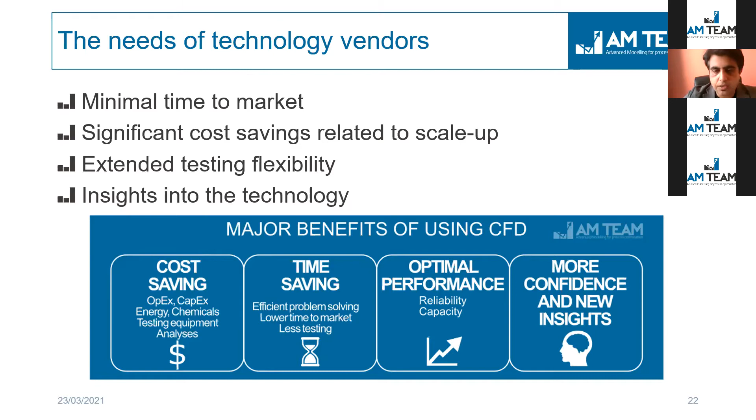So I will start with one example. In this case, the client is a Japanese client who were actually constructing a pilot for an MBR bioreactor. They had a very small lab scale bioreactor, which they wanted to scale up to a demonstration scale, so almost 30 times more than their lab scale. So this is a huge transition. It involves a lot of expenditure if you have to do it stepwise, or have to just build it and then start retrofitting or optimizing the design.

So what we did in the CFD was that we started with a lab scale, validated the CFD model, then we moved to the large scale, and then we tested several configurations to come up with a very good design which will optimally perform. So this CFD modeling actually helped them in saving a lot of time, and there was a drastic reduction in time to market for this technology. In this case, we tested around 5 designs in 5 weeks. So this is the order of magnitude we were working in. Okay. So this was the final design which was working the best for the client.

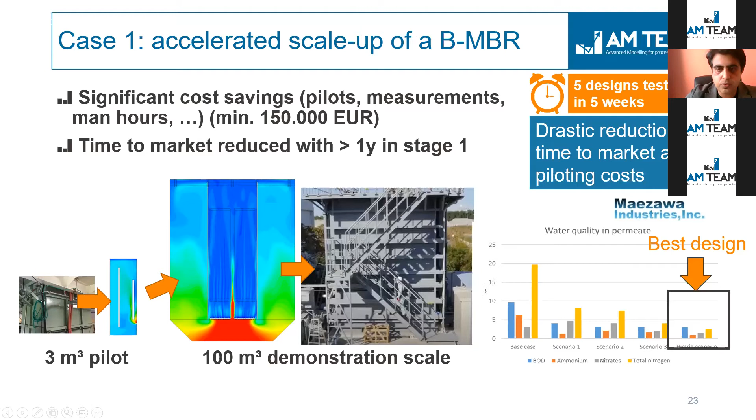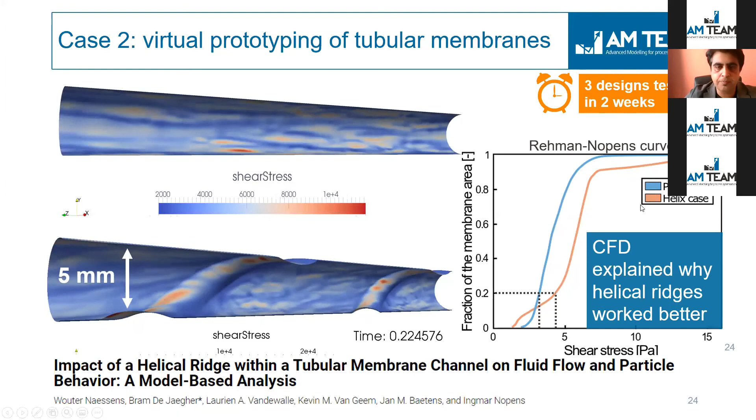So we can see it on these curves for the shear stress, that the red curve, which is for the helix case, is on the right, which means more shear compared to the plain case, for example. So this was a very interesting study. In this case, we had 3 designs which were tested in 2 weeks, more or less. Okay.

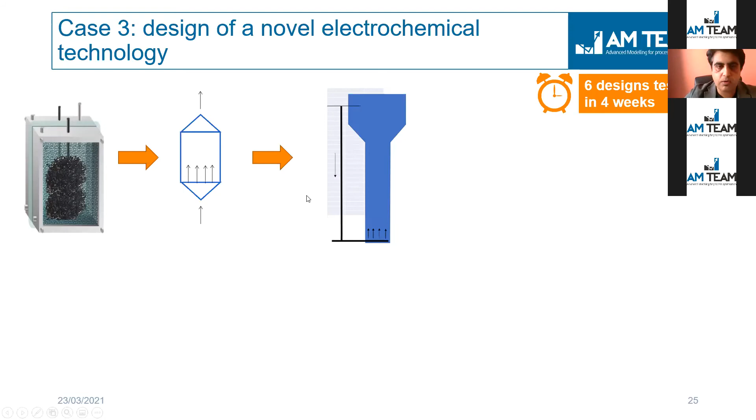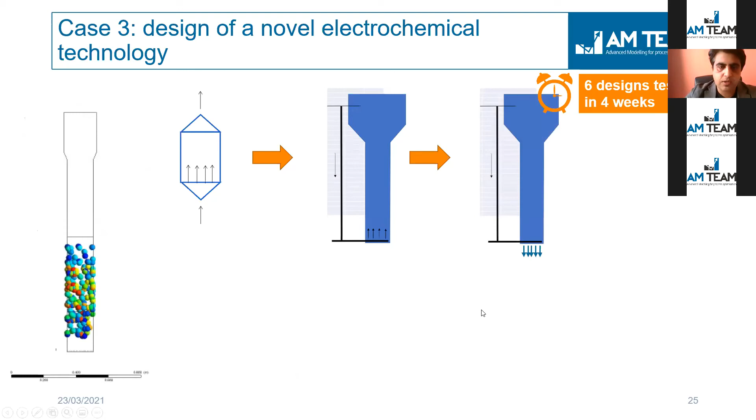So this is another example. It's a novel electrochemical technology. In this case, the idea is that we fluidize the particles using water. And as you can see, the particles are sitting at the bottom of a reactor, and if you're pumping some water from the bottom, it will probably be very hard to fluidize them. So we started using CFD modeling for that, and we found out that if we just go by the general engineering design, the particles were not really suspending, so they were just falling, as you can see here. So we tried to make some design changes, for example, moving the liquid inlet from upwards to downwards, and see if it can help.

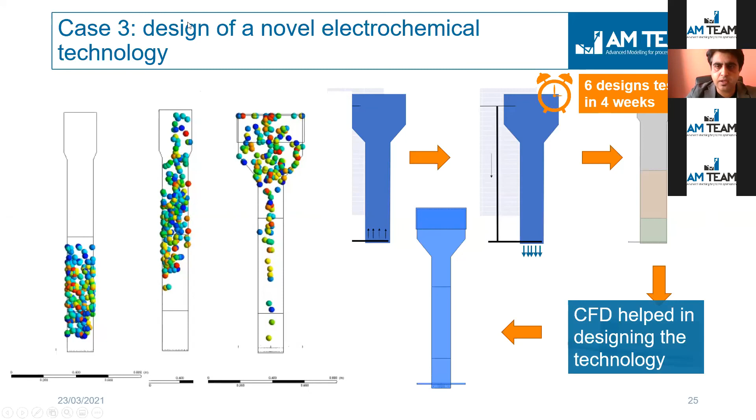We went on making these changes, and eventually we got the particles to suspend. But as you can see, the fluidization of the particles was not very uniform. It was very fast, and every particle was really going to the top, probably leaving the reactor at the top. So we further optimized the design, and now you can see the fluidization of the particles is much more uniform. They are also coming back, and they will keep fluidizing. So this is a very good example where we started from a very basic idea, and the whole design was really developed in the CFD. In this case, we tested around 6 designs, and it took us around 4 weeks. So in this case, CFD really has been designing the technology.